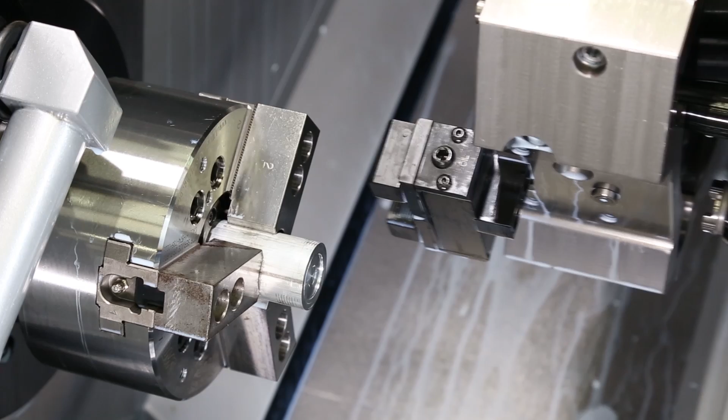Well, I went and got some coffee, you listened to our theme song, and our lathe made a few more parts. Now the benefits of using a bar puller are obvious. It allows me to walk away from my machine for maybe 30 minutes at a time to attend to other projects, while my Haas lathe continues to pay for itself. Now, we don't sell bar pullers, we sell machine tools, but we want you to succeed and to get the most out of your Haas machine.

So right now, we're going to show you how to use this effective tool. Our bar puller is basically a gripper that we've mounted onto the turret. You command it just like any other tool, and we've commanded ours to come in just above the bar, and then using a G1, we've fed it down onto the stock with the spindle stopped using an M5 command.

From there, we'll use an M11 to open up the chuck. Then we'll dwell for about a second, making sure that the chuck has enough time to open fully before we pull that bar out. Now, in my code, I've used a G1 W1.07.

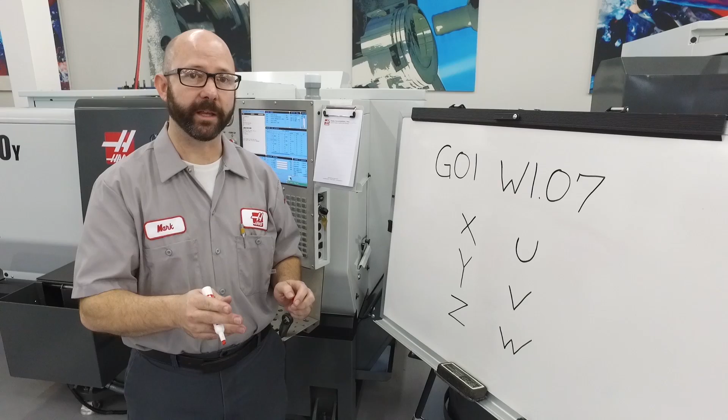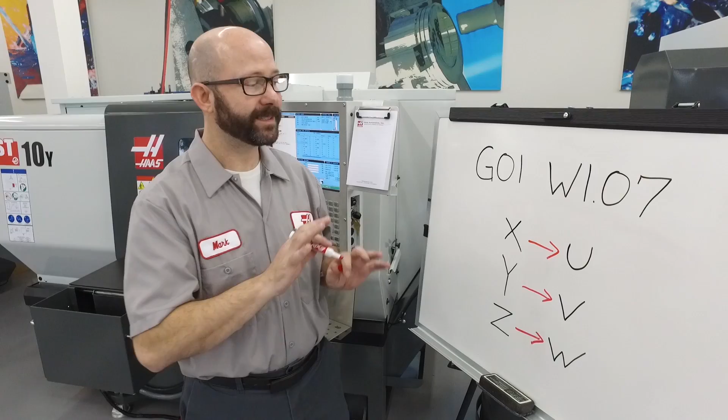On lathes, when we want to move the X, the Y, or the Z axis incrementally, we'll command a U, a V, or a W. Now, I've used a W1.07, which is going to move my Z axis in the positive direction from where it sits, 1.07 inches. Now, something to remember is that typically our X and our U values are in diameter.

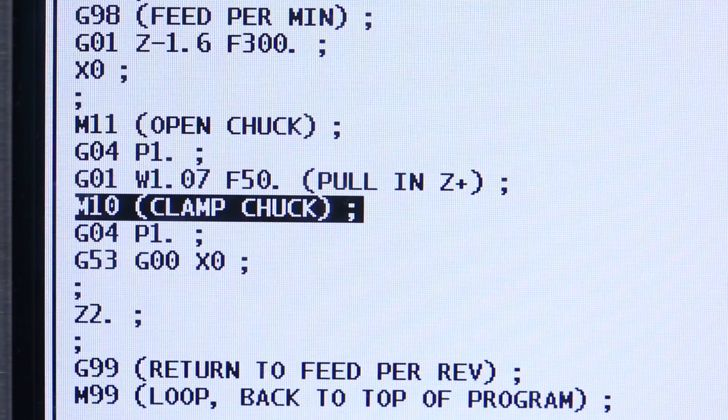From there, once our bar has been pulled, we're going to close that chuck using an M10 command, and then dwell for about a second, making sure that the chuck has plenty of time to close before we program that tool up and out of the way.

Now, if you press the cycle start button during your setup and get a message that says chuck unclamped, you may have to turn on parameter 278 bit 8, chuck open C start. You'll get that warning message if cycle start is pressed while the chuck is open.

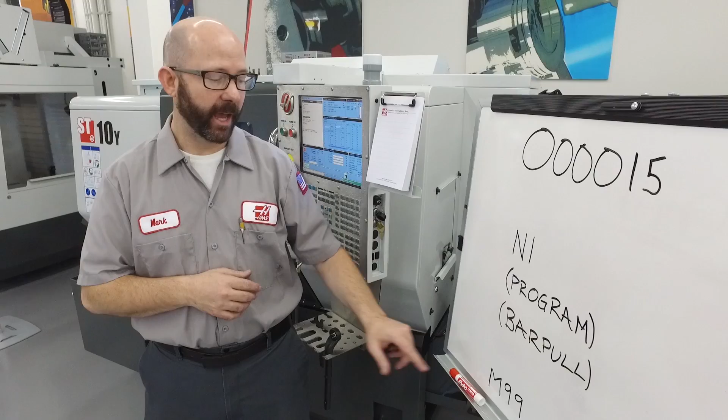Okay, now it's time for the fun part. I've written my part program, we've written our bar puller program, and at the bottom of my program, I've changed it from an M30 to an M99, so it runs more than one part.

But how many parts are we going to run? We have to have the program stop at some point once a part limit has been reached. We're going to show you 3 quick methods to do that now.

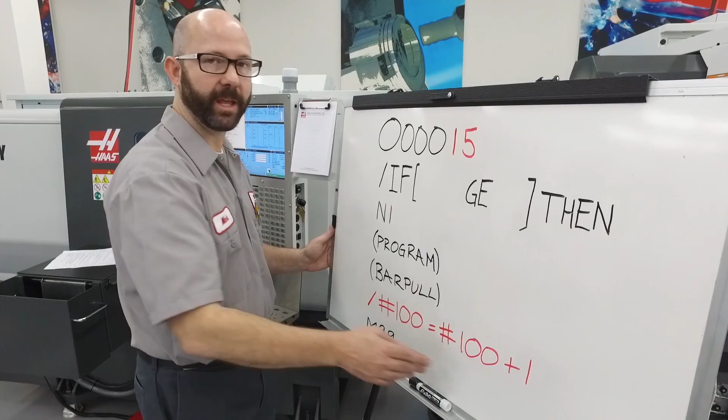Now with this method, we've added a counter to our program. Pound 100 equals pound 100 plus 1. Each time a part is run, it adds 1 to our part counter. Now if I load a new bar, I can go to the macro variables page and zero out variable 100.

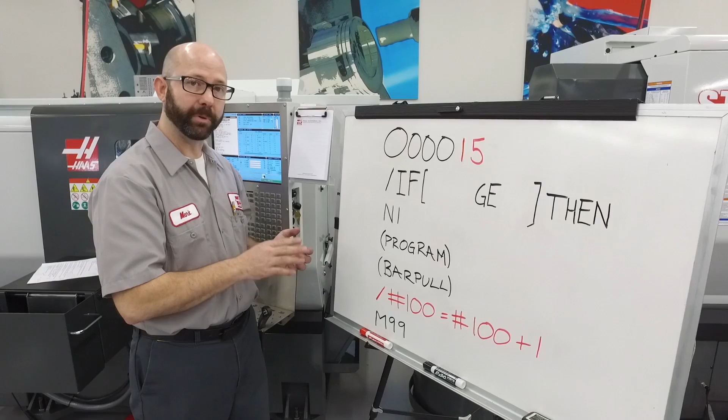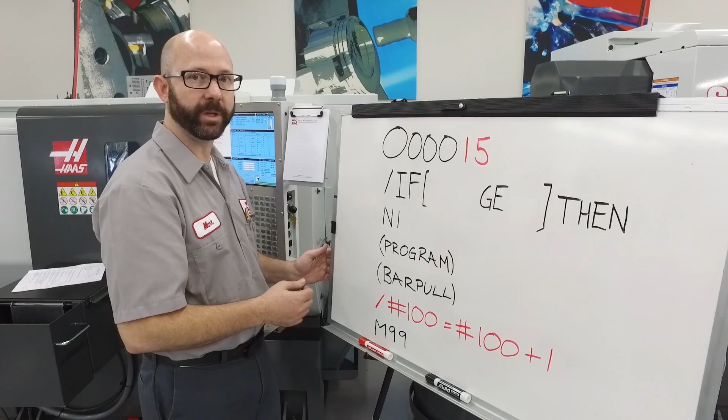Now there are quite a few codes that can block look ahead. The slash block delete is one of those. We've added it here because we don't want our part counter to increment before the program has reached this exact line of code. It's just a macro trick that we use. I'm running a 48-inch bar, and we want our program to stop once we've reached 44 pieces.

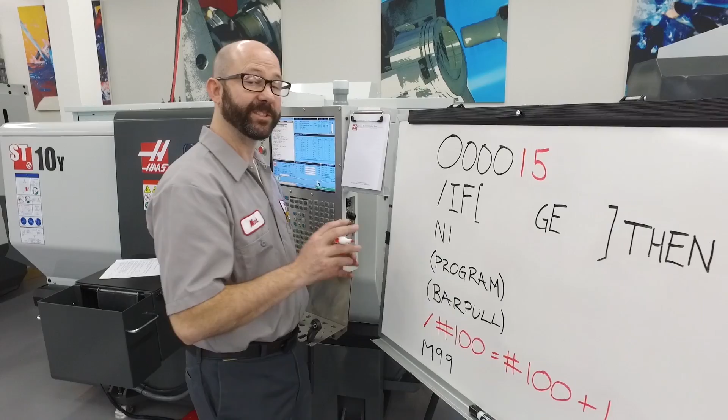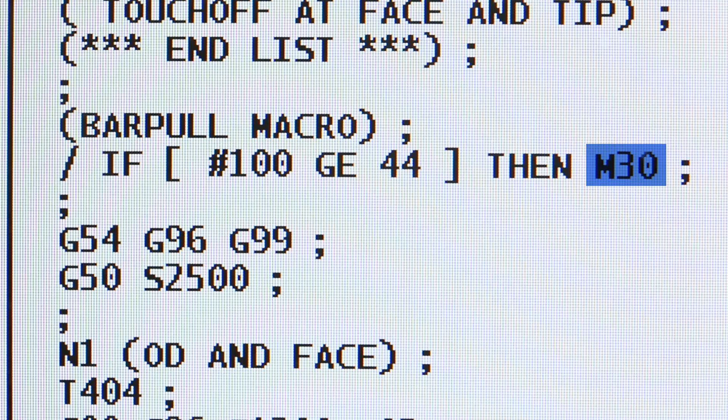That's what this line of code is going to do for us. This is macros 101: if the expression within the brackets evaluates to true, then run this code. We're going to fill those codes in right now. If pound 100, our parts counter, is greater than or equal to 44, our part limit, then M30, stop running. Now if my part counter is less than 44, it's not going to execute my M30, it's just going to continue on with my program until we finally reach that part limit.

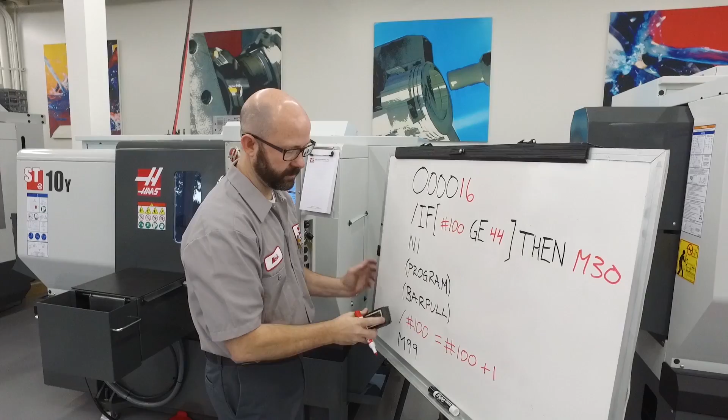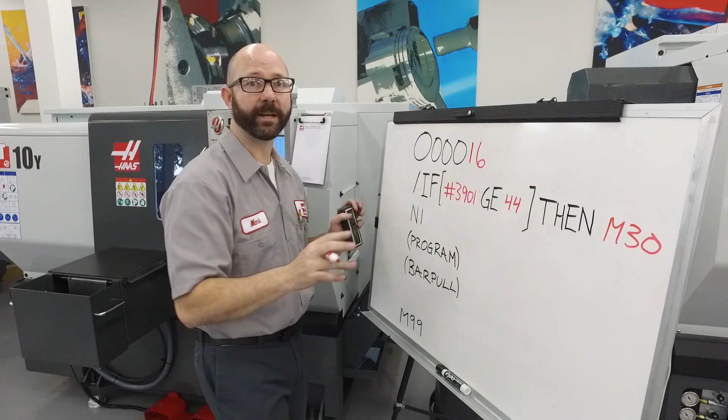With this second method, we're still going to use our if-then statement, but we're going to get rid of our counter. This is because the Haas control already has a built-in M30 counter, and it's tied to macro variable 3901. Now we've already made an entire tip of the day video using variable 3901 and talking about our M30 counters, so be sure to check it out.

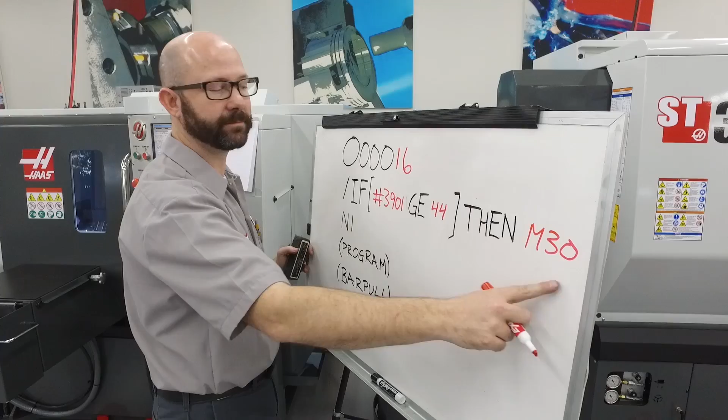Well now, with a single line of code, we're saying if our M30 counter is greater than or equal to 44, then stop running parts. And of course, if our M30 counter is less than 44, then keep running parts until our part limit of 44 is reached.

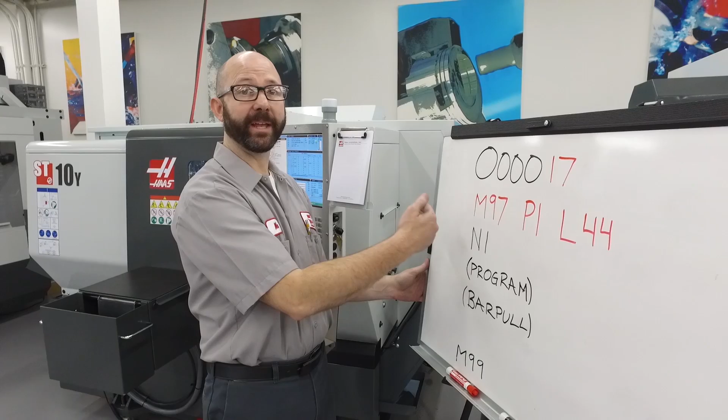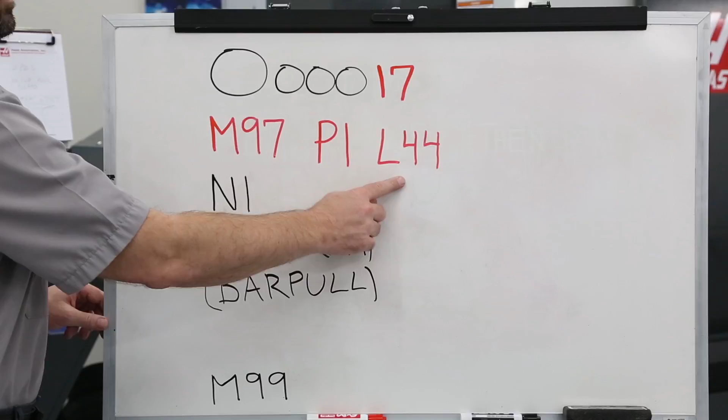Now for this last example, we're going to use an M97 internal subroutine. M97, call my internal subroutine P1. The P1 refers to line N1. The sub is everything in between the N1 and my M99. It's going to run this subroutine 44 times. It's pretty straightforward. It's a good way to program a bar puller.

I prefer the macro method, just because if reset is pressed during this program, you're going to lose track of how many parts you've run, and you'll be changing your L value all day. With the M30 counter, or even our pound 100 counter, if reset is pressed, or you start and stop your program, your part count is still good.

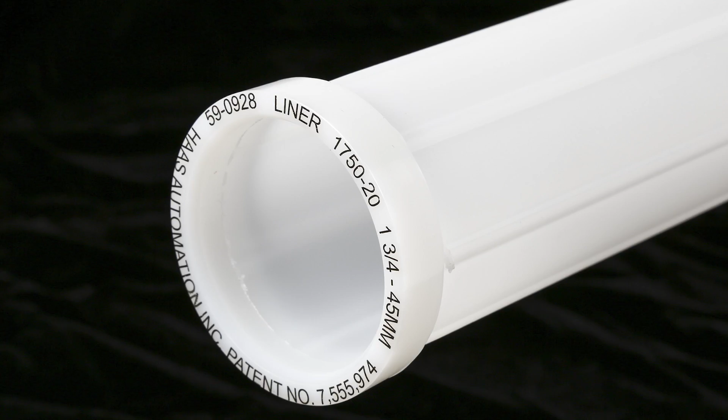Now, as we finish up, we'd like to leave you with three important tips. First off, be sure to follow the instructions that came with your bar puller. Each bar puller is different. Number two, be sure to support your stock in your spindle. We use the patented Haas spindle liners for this, which support the bar across the entire length of the spindle. Now this gives us the added benefit of being able to run much longer bars.

And if you're using a bar puller, that means you can walk away from your machine for a much longer time. And finally, and most important, never let your stock hang out the back of your spindle. Nothing good can happen.

Now, if you're doing a lot of setups or running any kind of production, it wouldn't take long for a Haas bar feeder to pay for itself. With its large capacity bar magazine and software that's fully integrated with your Haas lathe, the machine can run unattended, with the operator just stopping by to check on his parts and load new bars, all while the machine is running.